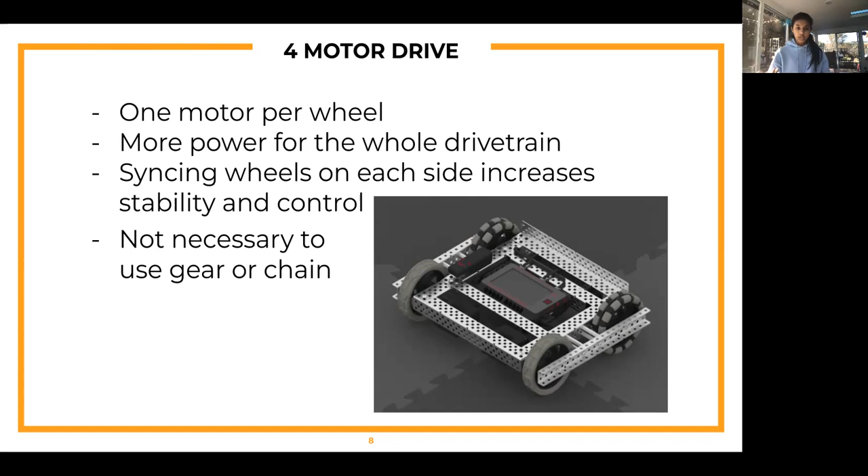This increases the stability and control of the entire drivetrain. It's not necessary to use gears and chains since the motors are all connected to each wheel, but it's usually better to do it.

Next we have a 2-motor drivetrain. This one requires fewer motors—only 1 per side of the robot instead of 1 per wheel.

You'll have 1 motor on one side with a gear train or chain connecting that side, and 1 motor on the other side with its own gear train or chain. So it's actually necessary to sync both wheels on either side for this robot.

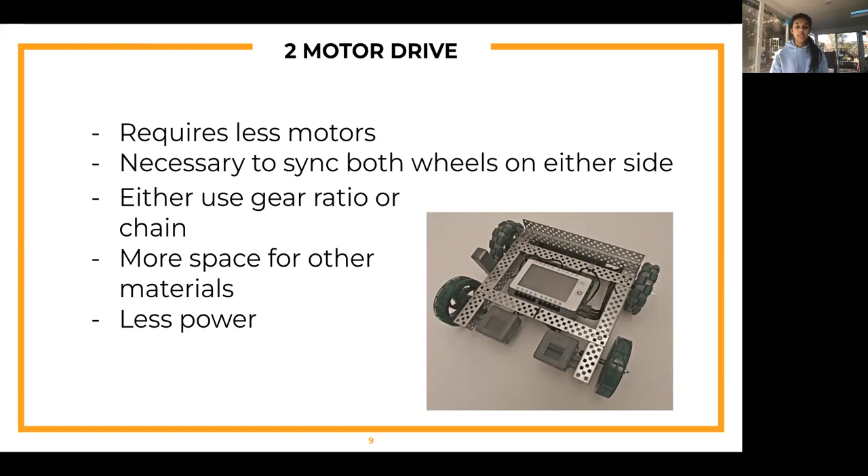Like we said, you can use a gear train or chain, and it'll be easier to make space for other materials since the motors won't be in the way. That's helpful, but as discussed, there will be less power because there are fewer motors.

For a holonomic drive, this is a drivetrain that can move in all directions—not just forward, backward, right, or left, but northwest, northeast, southeast, southwest, basically all directions.

This requires 4 motors because 1 motor is attached to each wheel, and they move in a specific, programmed order. That's why it requires 4 motors—each one is specifically programmed in a different way to go a specific direction.

Because of that, it's much harder to code than the other two drivetrains we talked about. However, there is constricted space in this one because the motors all point inward instead of outward, so you have a bit less space in the middle, but you can build on top, of course.

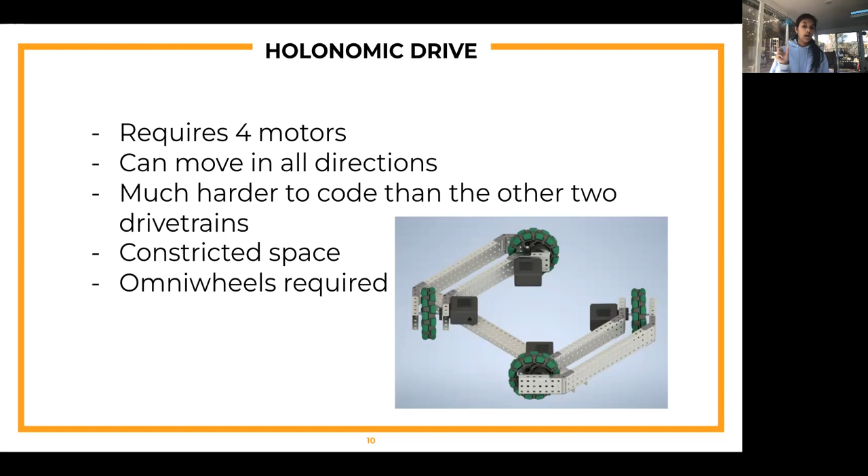For this drivetrain, there are specific wheels required, called omni wheels. Omni wheels are really good for speed and holonomic movement.

If you look at the picture here, we have a full wheel with little rollers on all sides of it. Those rollers are why they're required for holonomics—even though a wheel might move in one direction, it can still move in another direction because of the rollers.

On the right here we have regular wheels, which are really good for traction and grip. Omni wheels slide really easily, so they're not as good for traction.

So if you really need good grip to get onto a platform or an elevated area, it'll be a bit harder if you use omni wheels instead of regular wheels.

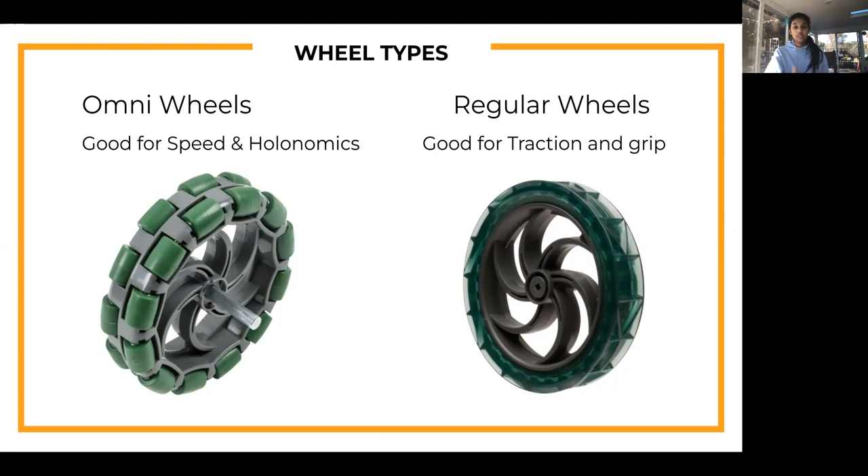So next we have lifts.

Lifts usually go on top of your drivetrain. These are not your final thing, but close to your final. They're basically what goes on top of your drivetrain and helps you gain elevation and do specific actions. For this one, we have a parallelogram lift, which can either be a 4-bar or 6-bar, and if you really want to get into it, an 8-bar, but typically we just use 4 bars or 6 bars. They're really good for controlled and extended reach, meaning they go up and down really nicely, just enough that you need, not too high, just the right amount.

These usually require 2 or 4 motors, depending on how much you can spare but also how much power you really do need. 2 motors obviously will give you a little less of a stronger lift, but 4 motors will give you that really good push that it needs.

Many different structures can be added onto it. For example, over here, they added 2 C channels or pieces of metal that you can maybe use to do some kind of action you want. And it's very compact because it folds down into a very nice compact space in your whole robot, so you can drive around without tipping over.

Next, we have a double reverse 4-bar, also called a DR4B. This one requires 2 to 4 motors, more can be used for greater power. Basically it requires 2 motors over here, and if you really want to add some more strength, you can add another 2 motors over here.

So how this double reverse 4-bar lift works is that it's like the last lift we talked about, a 4-bar, but 2 of them. Here we have the first one - this is the first part, and then these 2 C channels on either side extend outward. Then you have the second 4-bar right over here, and it faces the opposite direction, with these 2 C channels extending outward here. So it has one 4-bar that goes like this, and then another one stuck on top that moves the opposite direction.

It has a really good extended reach because they're basically 2 4-bars stacked on top of each other. However, it's a bit of a complicated build because it requires a lot of gear ratios, and many different structures can be added as well. For example, in this one, they have a clamp attached, so you can have a claw or clamp that attaches onto the object you want to carry.

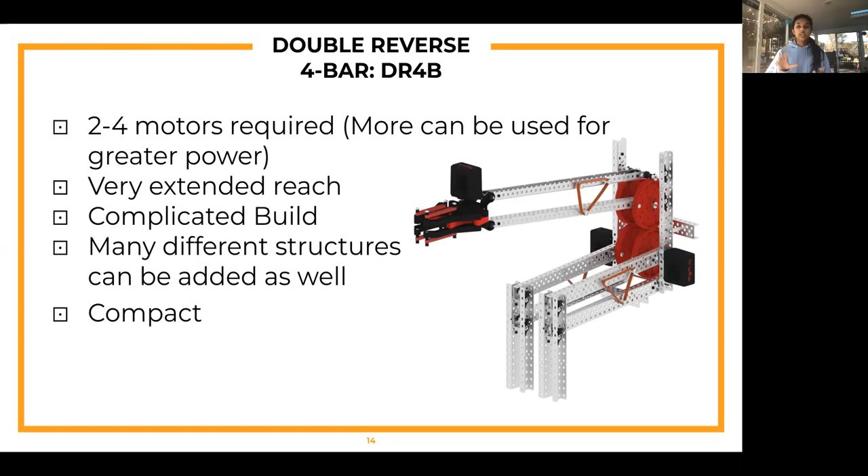And like we said before, all lifts need to be compact, so this one is very compact. That's why it faces opposite directions - if it faced the other direction, it would most likely tip over due to all that weight in the front. So it faces the opposite direction and folds down very neatly. You can see it fully extended in this picture - the first 4-bar and second 4-bar, with a structure added on top.

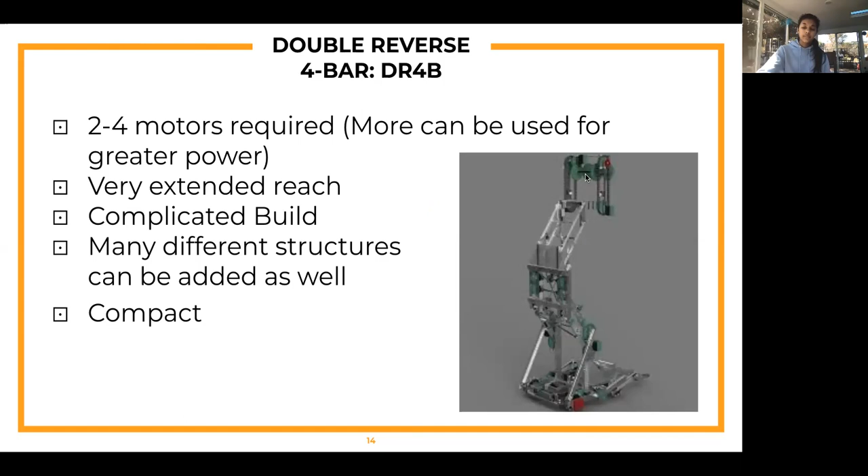Next we have a rack and pinion. This lift basically just moves vertically - the other ones kind of move outward and diagonal, but this one just moves vertically up and down. Generally only 2 motors are required for this one. It's a very simple build - all it really requires is some gear and chain that makes it push upward, the whole thing revolves, and then it just moves upward.

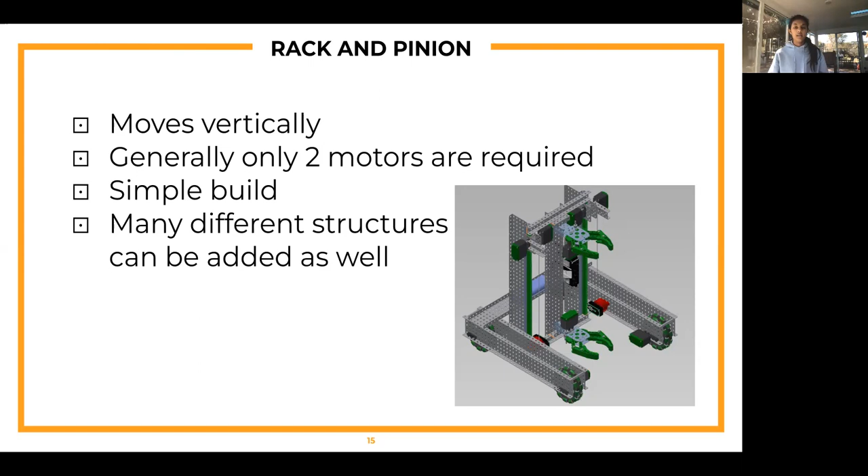Okay, additional required structures. So we talked about before, like claws, clamps, that kind of thing. We'll be getting into that.

And then it is to be added onto a lift. You can't just have this on its own, otherwise you won't get the elevation that it needs. So you usually put this onto a lift so the lift can move with it, and then this thing can clamp down wherever you need it to.

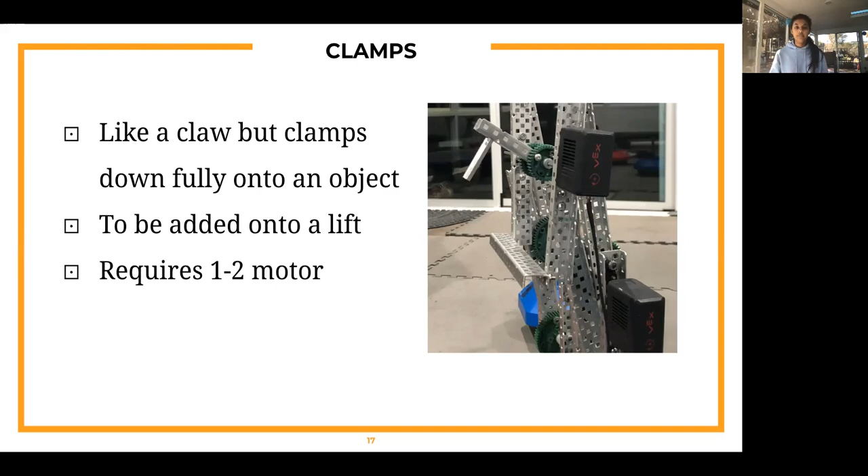And generally that requires 1 to 2 motors, depending on how heavy the object is. If it's a little bit heavier, you might want to go for 2 motors. But clamps are generally a very useful additional required structure that you could have.

Intakes are used to basically just suck objects into a robot. They're made with gears, chain, and flaps, so when you have them positioned at the end of your robot, they suck in objects. They turn really quickly, and so the objects kind of just flush into it.

And they're usually used to accompany other lift mechanisms, as in they're supposed to go on top of lifts. You can't really just have them on their own.

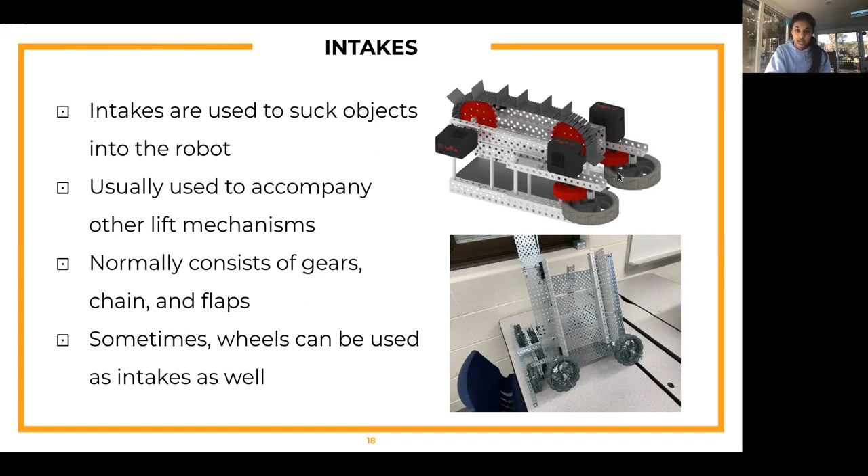And sometimes wheels can be used for intakes as well. As you can see in these pictures, there are wheels being used here, a wheel here, a wheel here. I really like this design, especially because they have two different intakes working together. First the object goes in here and then it's pushed underneath by this whole revolving thing. It's very useful and very smart.

So now we're just going to talk about examples of possible robots that you can build using all the things talked about in this video. So first thing, this is example 1.

So a very nicely constructed robot.

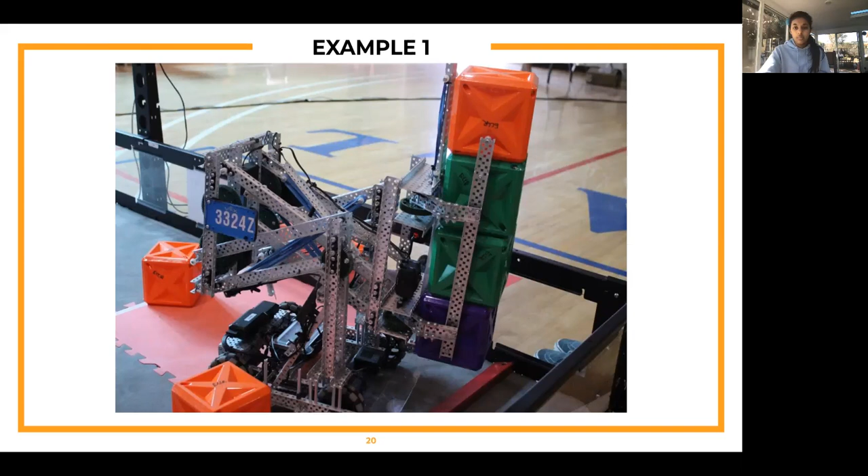Next, we have our second example. So in this one, we also have a 4-motor drivetrain, a very general drivetrain. It does everything that you need it for.